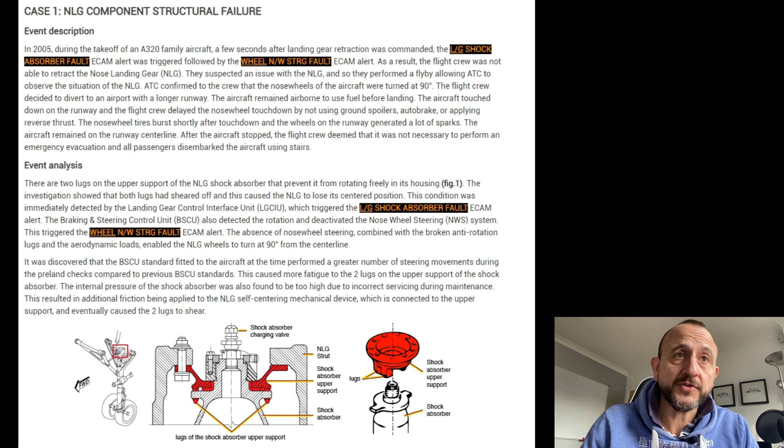So going on to the event analysis, there are two lugs on the upper support of the nose landing gear shock absorber that prevent it from rotating freely. This is shown in figure 1. I'll put it up on the screen. The investigation showed that both lugs had sheared off. This caused the nose landing gear to lose its centered position. This condition was immediately detected by the landing gear control interface unit, the LGCIU, which triggered the landing gear shock absorber fault ECAM alert. The braking steering control unit, BSCU, also detected the rotation and deactivated the nose wheel steering system. This then, of course, triggered the nose wheel steering fault ECAM alert.

The absence of nose wheel steering, combined with the broken anti-rotation lugs on the gear itself and the aerodynamic loads, enabled the nose landing gear to rotate through 90 degrees from the centerline. It was discovered that the BSCU standard fitted to the aircraft at the time performed a greater number of steering movements during the pre-land checks compared to previous BSCU standards. This caused more fatigue to the two lugs on the upper support of the shock absorber.

The internal pressure of the shock absorber was also found to be too high due to incorrect servicing during maintenance. This all then resulted in additional friction being applied to the nose landing gear self-centering mechanical device, which is connected to the upper support, and eventually caused the two lugs to shear. So some maintenance issues there, together with an older standard BSCU, eventually caused these components to fail.

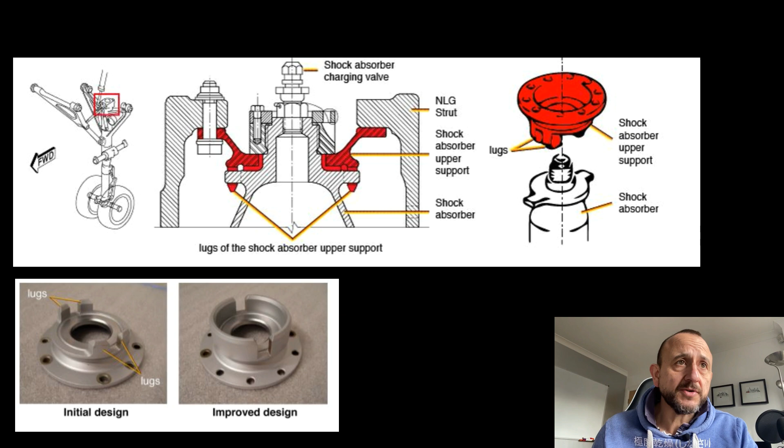Yeah, you know, we all learn from these things, don't we? I mean, of course, how many Airbus 320s are there in service at the moment? It's a short haul aircraft doing multiple landings, multiple gear extension and retraction. So it's through these events that you see the fatigue that these systems go through, and they develop this all the time to improve its reliability.

So case study 2, BSCU failure. In 2007, after takeoff of an A320 aircraft, the auto brake max on light remained, which of course should go off after gear retraction, and the brake system 2 fault ECAM was also triggered. During the cruise, the flight crew pressed the auto brake max push button, presumably to turn it off. They also set the anti-skid nose wheel steering switch to off and then back to on, which was not requested by the ECAM QRH OEB procedure. This had no effect on the auto brake max light.

We have to be really careful about doing resets that aren't certified or aren't listed in the QRH. It's not a procedure. Because as we know with the Airbus, these systems have multiple connections and we can actually make the situation worse.

So on the approach, the auto brake max light remained on after landing gear was extended, and then they got the landing gear shock absorber fault ECAM. The flight crew set the anti-skid nose wheel steering to off and the auto brake max on light went off, but the ECAM remained. The flight crew eventually landed with the nose wheels turned through 90 degrees from the centre line. So again, brake system fault here, landing gear shock absorber fault here, and the auto brake light staying on.

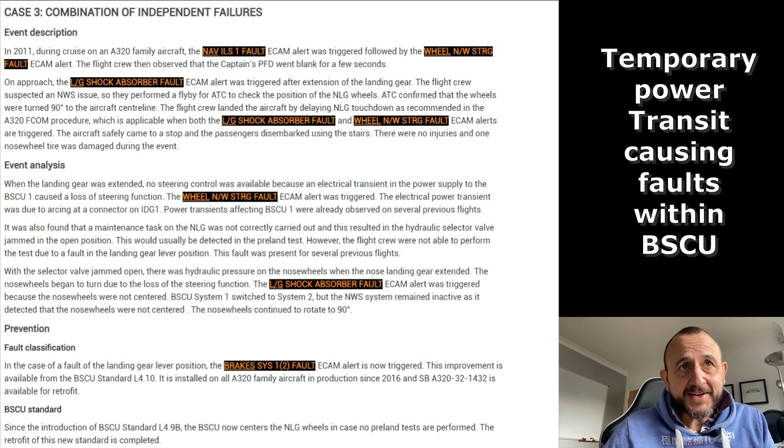Case 3, combination of independent failures. So in 2011, during the cruise of an A320 family aircraft, NAV ILS 1 fault ECAM triggered, followed by nosewheel steering fault ECAM alert. The flight crew observed the captain's PFD went blank for a few seconds. This is a bad day. There's quite a few things going on here, and this all comes, I think, from reading on, some sort of transient electrical problem.

On the approach, the landing gear shock absorber fault ECAM alert was triggered after extension of the landing gear. The flight crew suspected a nosewheel steering issue, so they performed a flyby for the ATC to check the position of the nose landing gear. Good idea. The ATC confirmed that the wheels were turned through 90 degrees from the aircraft centerline.

The flight crew landed the aircraft by delaying the nose landing gear touchdown, as recommended in the A320 FCOM procedure, which was applied when both the shock absorber fault and the nosewheel steering fault ECAM alerts are triggered. I made reference to this in the FCOM.

The aircraft safely came to a stop and the passengers disembarked using the stairs. There were no injuries, and one nosewheel tyre was damaged during this event. That's a good show, just one tyre.

Event analysis. So when the landing gear was extended, no steering control was available because an electrical transient in the power supply to BSCU1 caused a loss of the steering function. So that will probably explain the flickering of the PFD. The nosewheel steering fault ECAM also triggered. The electrical power transient was due to arcing at a connector on IDG1.

Power transients affecting BSCU1 were already observed on several previous flights. So obviously this is an ongoing problem, or was an ongoing problem on that aircraft. It was also found that a maintenance task on the nose landing gear was not correctly carried out, and this resulted in the hydraulic selector valve jammed in the open position. Interesting.

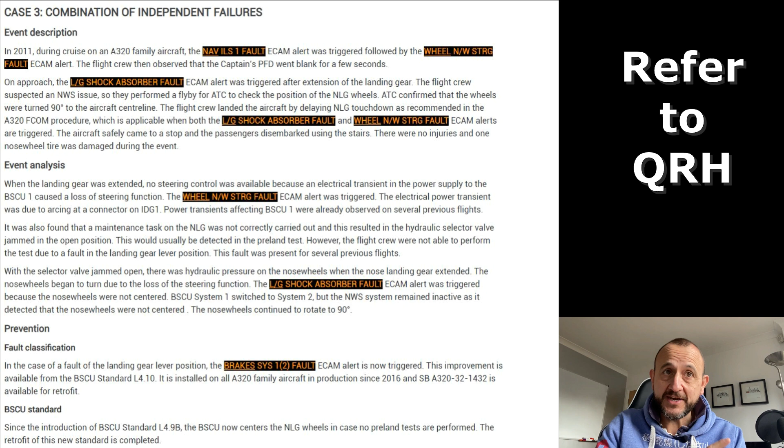That I didn't know, so that's really useful. So flicking off the generator will swap control of the BSCUs. So if you had that transient power situation and it doesn't go over to BSCU2, as is the case with this crew, whether you'd know about it or not, I don't know. But if you got a flicker of your PFD, which would indicate a transient power problem, then carrying out that procedure is going to sort out your problem.

Happy days. All these things that are built in that you just don't know about. So the procedures are written, and of course they're written for a reason. But you don't always know exactly why, or there might be some things that are hidden behind.

So case 4, water ingress in the nose landing gear steering sensors. The event description: in January 21, so very recently, during the approach of an A320 family aircraft, the landing gear shock absorber fault and nose wheel steering fault. We're getting a picture here of what's going to happen. Alerts were triggered after extension of the landing gear.

The flight crew set the anti-skid nose wheel steering switch to off and back to on again, even though it was not requested by the ECAM QRH OEB. It wasn't requested at all. The flight crew landed the aircraft and delayed the nose landing gear touchdown as long as possible, as recommended by the FCOM procedure, which is applicable when you see those 2 ECAM alerts.

At nose landing gear touchdown, both the nose landing gear tires burst and the aircraft stopped on the runway. There were no injuries. The landing gear were turned through 90 degrees from the aircraft center line, and skid marks of more than 1,200 meters long were found on the runway.

Event analysis. During the inspection of the nose landing gear after the event, water was found in the 2 rotary variable differential transformers, the RVDTs. That's a mouthful. These 2 sensors provide angle of nose wheel steering position to the BSCUs. There you go, it's got angle sensors. Of course it would have.

3 days before the event, the aircraft was cleaned during a maintenance C-check. Water ingress into the RVDTs most probably happened at this time. Now that's really interesting, isn't it? And aircraft do get a wash from time to time. A ferry flight was performed after the C-check and cleaning.

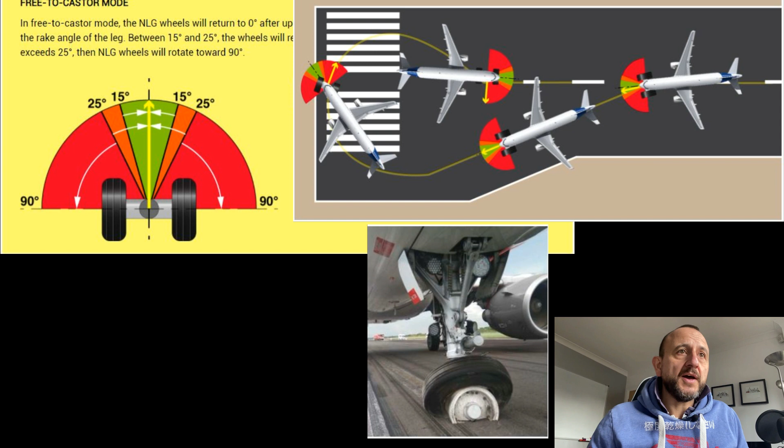Now, the last one we're going to have a look at is really interesting. Case number 5, 180 degree turn with the nose landing gear inoperative before takeoff. Now, it says later on in this article that it's not dispatchable after this event. But in March 21, so that's very recent, an A320 family aircraft was dispatched with nose wheel steering inoperative, MEL 32-51-01 nose wheel steering control system. This was due to a failure detected by the BSCU.

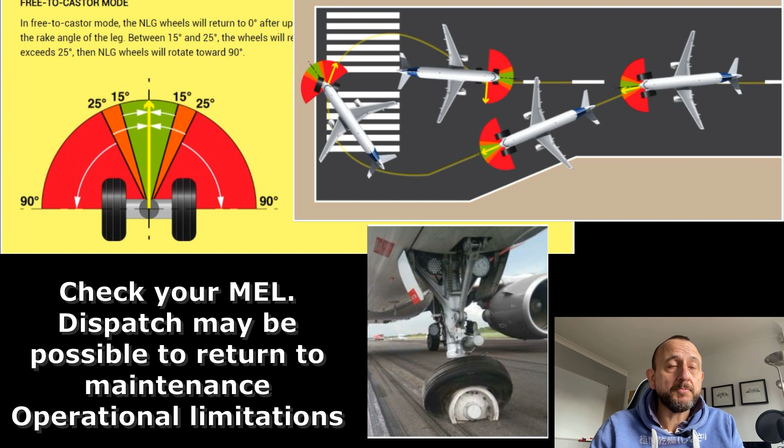They had a nose wheel steering fault. ECAM was triggered during engine start, as expected for the dispatch under the MEL. So they're going to get that because it was an operational procedure that you expect to see with the MEL. The MEL operational procedure states that the flight crew must avoid sharp turns when the nose wheel steering is inoperative. Differential braking and asymmetric thrust were used to steer the aircraft during the taxi out.

Sounds normal. The flight crew then performed a 180 degree turn to align the aircraft on the runway, contrary to the conditions set out by the MEL. So yeah, no sharp turns, 180 degrees, gosh. After liftoff, the landing gear shock absorber fault ECAM was triggered and the landing gear was jammed in the down position. The flight crew performed an in-flight turn back and landed the aircraft. The nose landing gear had rotated 90 degrees and both nose landing gear tyres burst on landing.

Event analysis: the nose landing gear was free to caster because of the inoperative nose wheel steering, and it shows you in figure 5 what that means. Now, free to caster is a nice diagram here. The nose landing gear will return to 0 degrees after up to 15 degrees of nose wheel steering due to the self-centering effect offered by the rake angle of the leg.

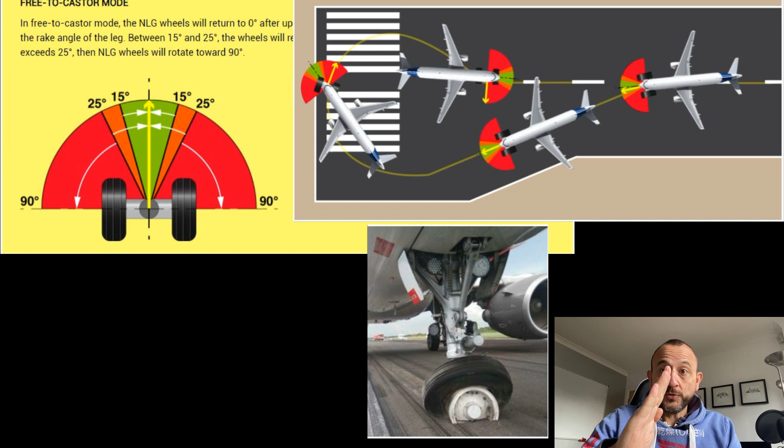Now the rake angle: if you imagine 90 degrees from the aircraft to the wheelbase here, that would be a rake angle of 0. Not 90 degrees, 0, okay, because it's perpendicular to the aircraft. The rake angle basically is the angle that extends the nose forward or rearwards, but in our case forwards. That's the rake angle from the vertical. And you'd notice, if you look at an aircraft taxiing as they turn, that the nose gear is slightly leaned forwards. That's the rake angle.

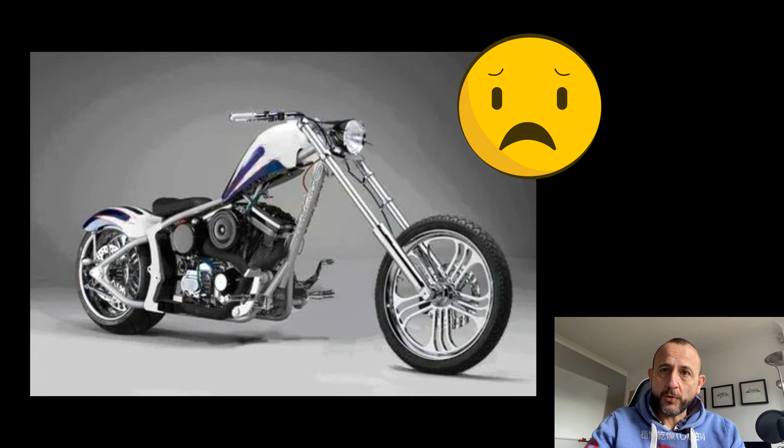If you're into motorcycling, then the rake angle you'll see is that from the stock head, the forks go down to the wheel. You know, the big chopper motorcycles that you see in Orange County, and the big Harleys with the handlebars up here and the long forks that stretch forward. They have huge rake angle. They don't turn at all, actually, but ideal for American roads. And the shorter that rake angle, the shorter the wheelbase, and the more manoeuvrable your motorcycle. So if you're into MotoGP, they're changing those things all the time to make the motorcycle turn more. Anyway, totally unrelated to what we're talking about.

So in free to caster mode, the nose landing gear wheels will return to 0 degrees up to 15 degrees of steering angle due to the self-centering effect offered by the rake angle of the leg. Between 15 and 25, the wheels will return to 0, but with more difficulty. If the nose wheel steering angle exceeds 25 degrees, then with no hydraulic pressure there, the wheel will just go around to 90 degrees.

Analysis of the recorded data showed the evolution of the nose wheel steering angle during the taxi out, which resulted in a U-turn. So they must have gone to a runway, had a turning circle at the end, and they needed the full runway available. The nose landing gear wheels remained below 15 degrees during the first left turn and naturally returned to the centered position as they're doing the backtrack.

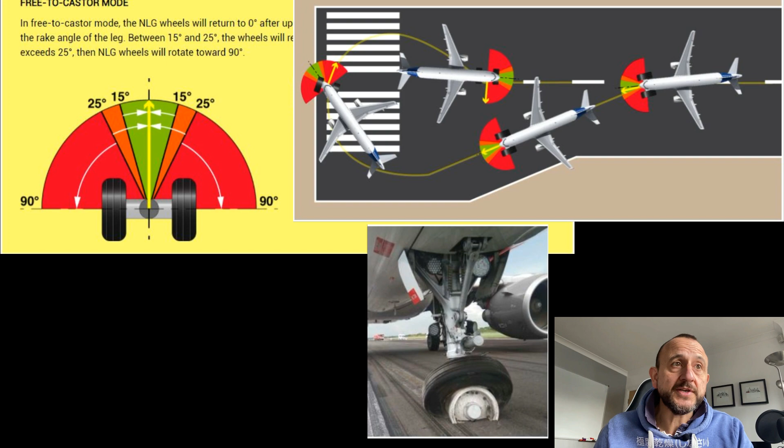It is also important for flight crews to remember that they must only perform the authorized reset procedures in flight, which are described in the system reset table of the A320 QRH. If the flight crew performs a reset that is not listed in the table, this could lead to unintended serious incidents. The action taken is to prevent the dispatch of an aircraft with the nose wheel steering system inoperative in order to avoid the risk of having a nose wheel at 90 degrees.